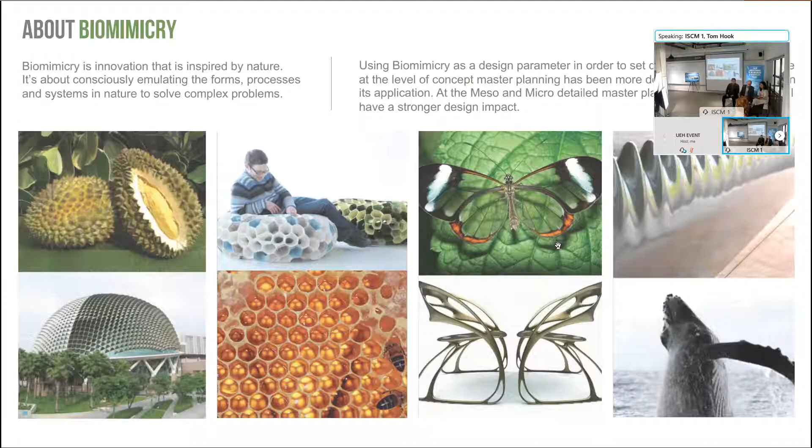Quan, one of the big things about this site was there were a lot of canals, a lot of waterways, a lot of natural systems already in place. Instead of going in and just backfilling it, we actually enhanced those waterways and used them as an asset or as a feature within the project.

Correct? When we went to the site, it's all mangroves everywhere, with the canal system. One of the things we see in Vietnam is actually a flooding issue, and the government is struggling dealing with that. So we came up with the idea of why don't we use nature to really create a solution for that issue, using landscape as infrastructure, which is a new trend that we apply to all of our projects recently, to really use nature to treat nature.

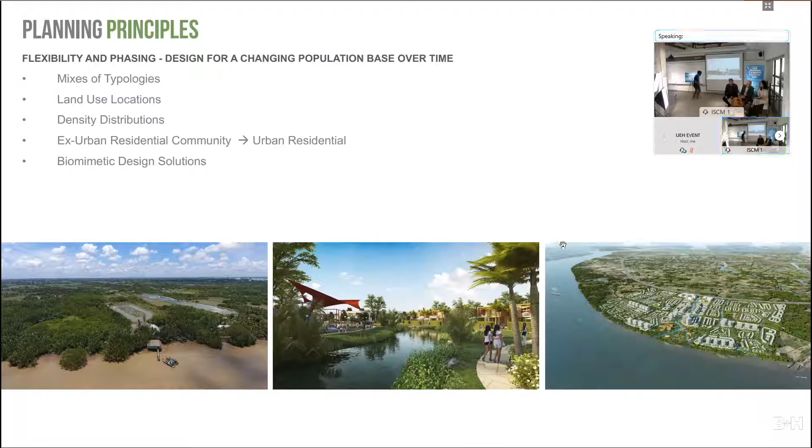Next, please. So we came up with this concept master plan. We really use the water system to create a framework. We don't define an urban grid anymore for this kind of project, but we use nature to create its own grid system, and we create communities around this natural system, which you can see right here, using the canal system to really define this grid.

We don't destroy that, we just enhance and create more of the waterways, but really connect back to the River in a very natural way. At the end of the day, that's still about the water management issue, so we don't have to spend a lot of money upfront for infrastructure.

And we create this kind of cluster of community around that, using the canal system and the landscape to really frame that community, which creates a phasing plan for the client to develop over time. And in that 50-meter setback of the riverfront, we keep it really natural.

We turn that into more of an education center. So at the end of the day, or on weekends, kids from Ho Chi Minh City can come here and really learn something about the natural ecologies here. That's the purpose, we create this kind of center for that education purpose.

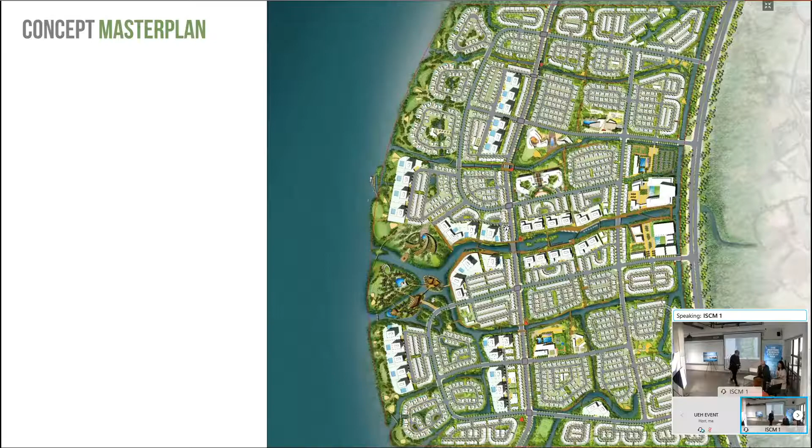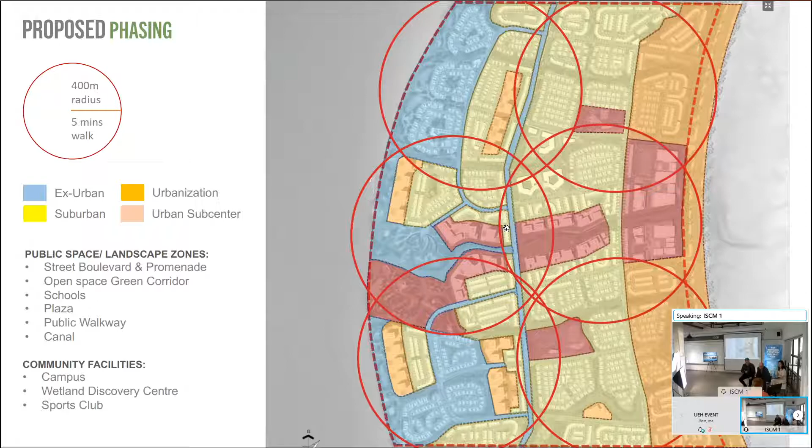Again, we propose the phasing plan just based on that kind of framework that we create based on the natural way. Next, please.

And we introduce stormwater management strategies, basically based on the system and landscape framework that we create throughout the project.

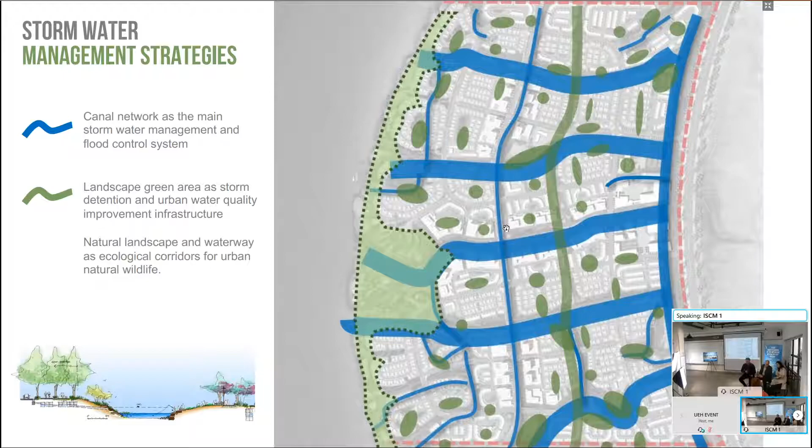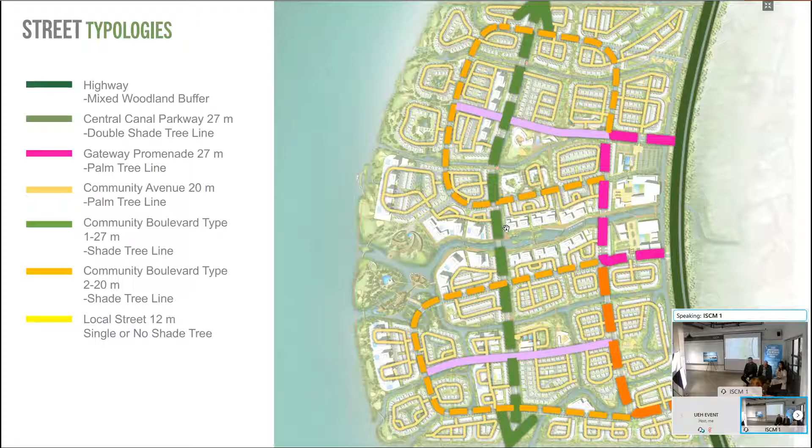Also, we define the street typologies as part of that. We usually define our road hierarchy based on the needs of people and how people move from one space to another, and how to connect all this community together. In this project, we create a very rich and continuous system for pedestrians to walk from north to south, east to west.

And the people have better access to the water system. Usually you see water features, but people cannot get into the water. We do it differently - people can actually have access and they can enjoy the water.

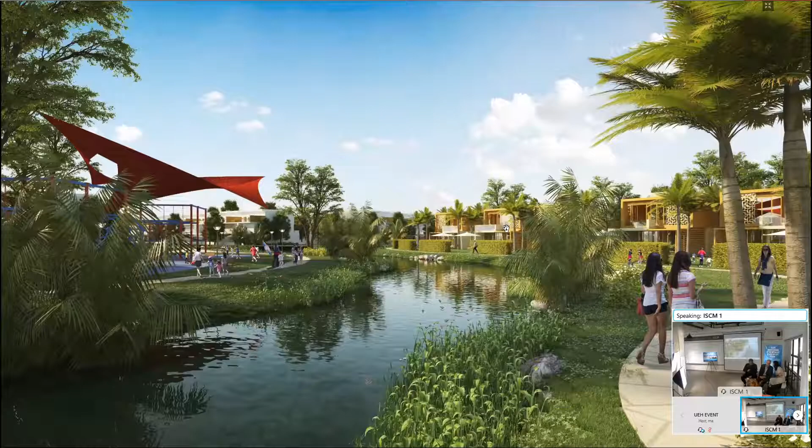Same way over here in this rendering, but you really create this kind of soft edge condition for the landscape. So you don't see concrete anymore. You see this kind of very natural setting using mangroves and all these species that live along the water.

To really reflect that kind of feeling that you're in Vietnam, not in Singapore or in the US anymore, right? Because this is Vietnam. And that gives its own identity to the community of Vietnam.

Okay, so if all of you know the District 9 area, which is now becoming the core of Thu Duc City - it feels like I'm on another planet. But if you know District 9, Thu Duc City and the core of the Innovation District, it's expanding. It's really the forefront of the eastern expansion of Ho Chi Minh City.

This is our new industrial and innovation future, and that is the main resource of the country's financial growth over the next probably several decades. So we were challenged to create a new urban center for that innovation district.

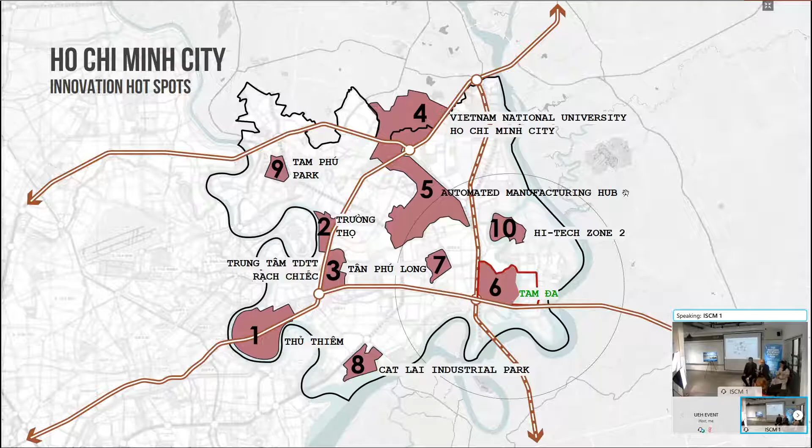So we thought of three big major agendas: innovation, of course, which is the driving force of the entire area; sustainability, meaning we need to integrate and balance workplace and living; and resilience, meaning it has to resist the inevitable change that will happen.

Our vision is a fully integrated public realm with accessible educational opportunities, based on the matrices presented earlier by Tom. This includes connectivity enhancements and distinction between district purposes, so each sub-district has a specific purpose and identity, with serious attention to increasing public amenity like shopping, retail, and culture, along with reduction of private cars and consideration of new alternatives.

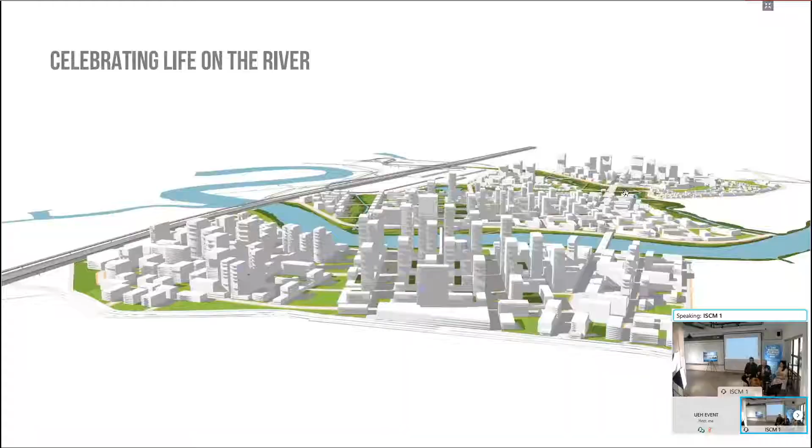This is all about celebrating life. This will be a CBD of at least 120,000 in the population.

Oh Tom, yeah, do you want to say something? No, go ahead Steve, I don't want to say anything.

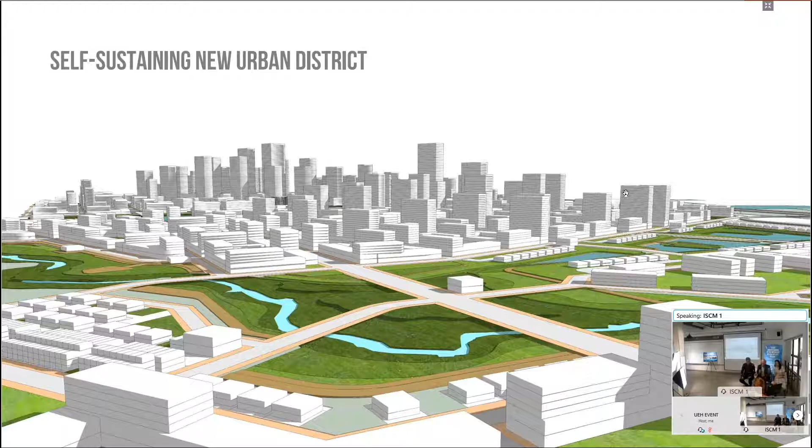Celebrating life on the river, creating a self-sustaining new urban district. These are office buildings, but also a variety of mixtures of densities of residential, low, mid, high, villas, shop houses—all kinds of ways of living like we enjoy in the center city. Innovation hubs, office buildings, retail streets, and a system of parks that link everything together.

In our recent masterplan projects, we're using the river as a center of development, not the center as development. So we develop everything based on the river, which unifies the center of this community—like thousands of years ago when people lived by the water and developed their urban centers on the river the same way.

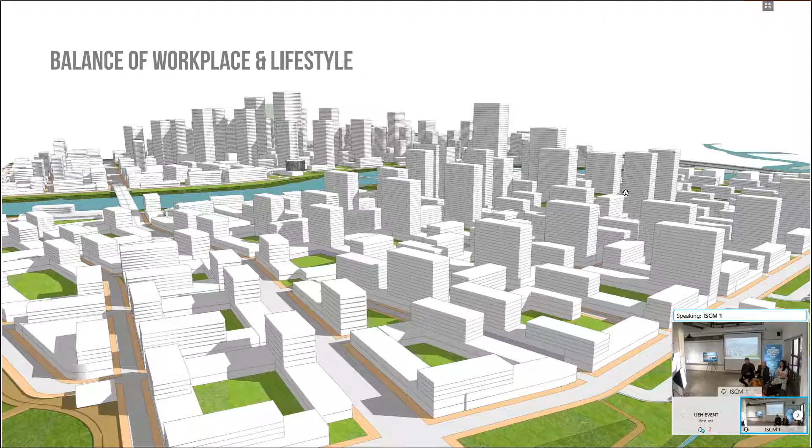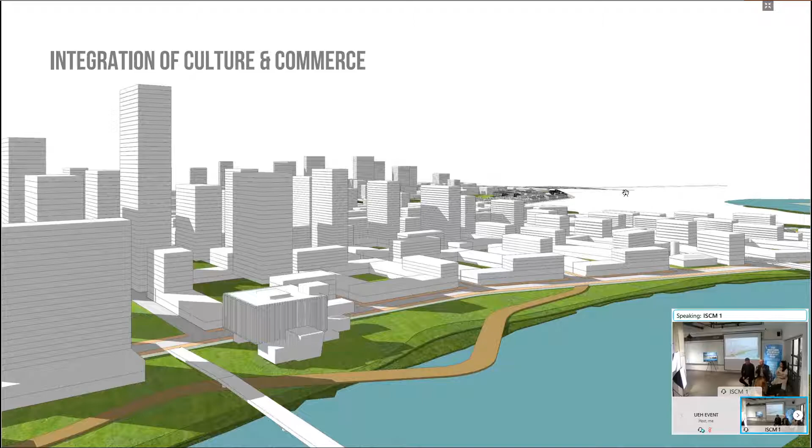It's really all about life on the river. Unlike District 1, we are bringing people to the riverfront, the river parks, and recreation activity. This is the new urban center of the eastern district, one we hope will inspire a new cultural core for that eastern expansion.

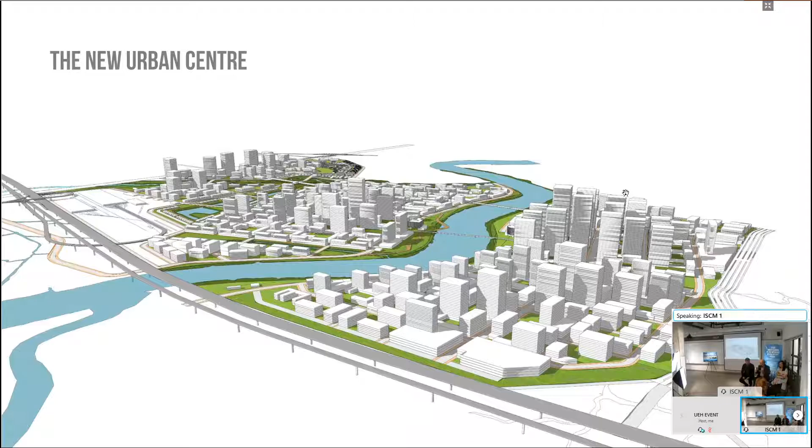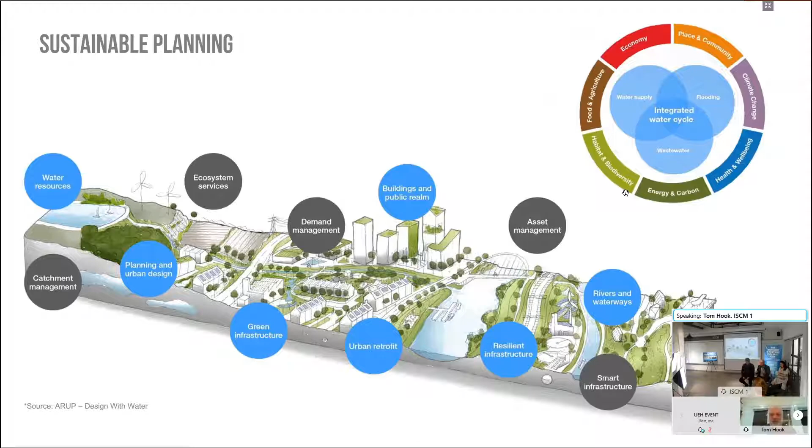Again using sustainable planning, through our greenways—using biomimicry and other methodologies—we are preserving and respecting the existing infrastructure of green and incorporating that into the new urban fabric.

A big issue here is land formation—how do we create resilience to sustain against the 2050 map I showed you earlier, where most of this place will end up underwater at high tide, especially during storm surge levels. So it's a balancing act.

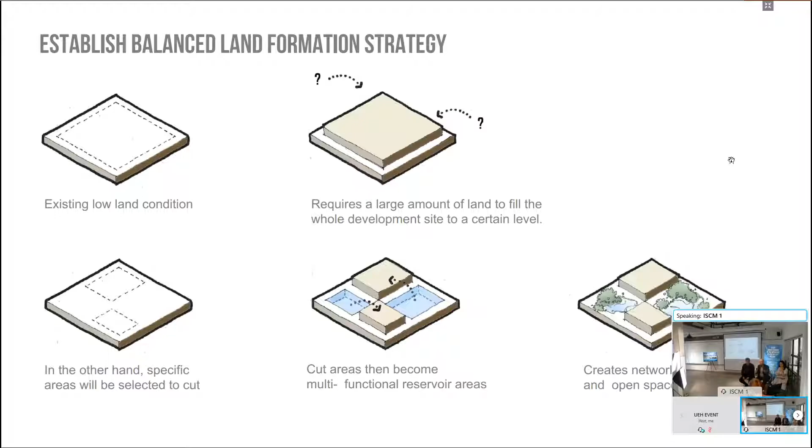Building, creating lakes, and then creating land. We use this strategy not only for this project but for many living by water and canals. Usually cut and fill settles things up—we classify where the soil will fill the land, filling up about 2.5 to 3 meters. We create water systems, lakes, reservoirs, and canal systems, using that soil to pump up the sites, so you don't have to transport soil from elsewhere to save cost. The water bodies can also be used for district cooling to cool our buildings. There are a lot of advantages—pretty much a balance, bringing life together with nature.

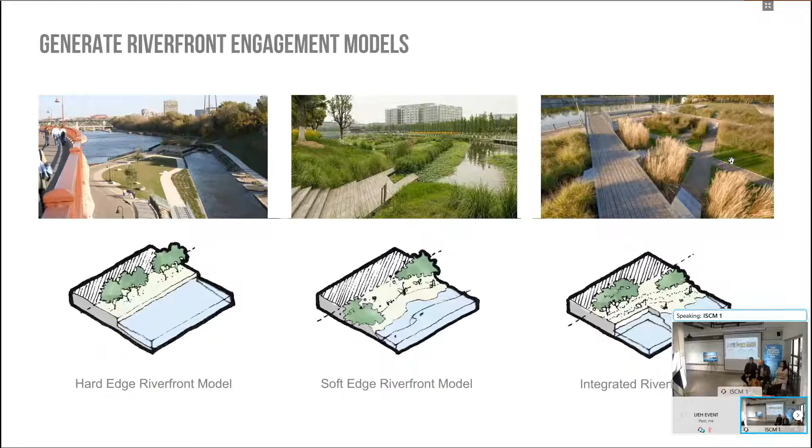We're creating a whole variety of riverfront engagement models—some riverfronts will be urban, while many will retain their natural ability to absorb water during rainy seasons. It's really about learning to live with nature and building on that, integrating it into the natural fabric.

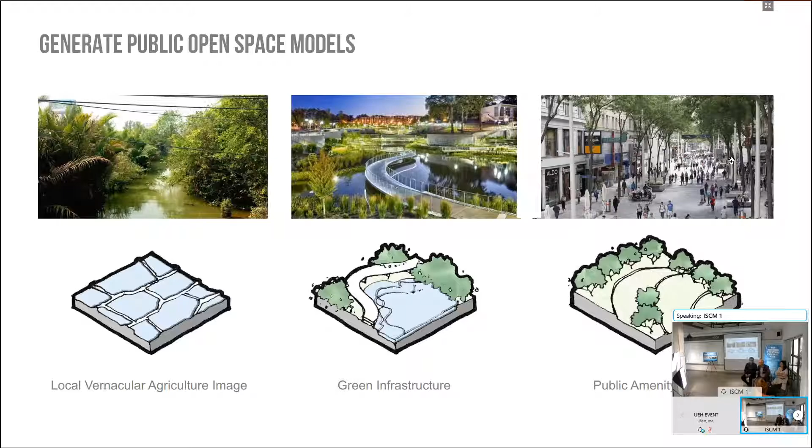The key to this whole thing is that when we started, we had no real development program—we had a limit of 55 stories. Given the land area of about 400 hectares, we sat down to think about the perfect balance of workplace, living, and amenity provision for the overall innovation district, remembering this is downtown for a much bigger area. Given our history with these kinds of projects, we created a very integrated and balanced program, and beyond that, we integrated uses not only in the same block but also in the same buildings—you don't need a car in this city to get from where you live to where you work, maybe just a scooter.

You can take mechanical bicycles from your place of living to your place. That was our third objective.

Another purpose of this kind of model that we see recently in downtown areas over the past 10 or 5 years: people started living downtown, like in Toronto 10, 15 years ago. Now downtown is like nobody's there, and now people are actually starting to move back downtown to live. That kind of model and thinking, especially what Steve mentioned about low impact on transportation, I think the community is trending towards that.

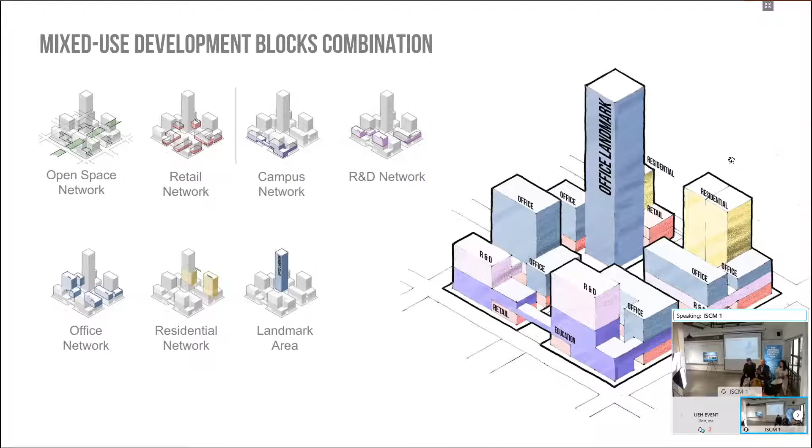So our plan is a street grid of about 110 by 130 meters, not unlike the average street grid in District 1. It has a lot of pedestrian transparency and access through that urban grid, acknowledging all the existing waterways, and creating a whole variety of density, workplace, and lifestyle throughout that urban context.

Steve and I learned a lot from the Saigon South Master Plan, which we did back in the 90s, and then the Thu Thiem Master Plan came out later on. We learned from those lessons because we'd been working on projects where the master plan didn't give investors enough flexibility to execute their projects. So this new modular system gives them that flexibility to really think about the building typology, what they're going to build, the cost up front, and what kind of land uses they're going to develop.

So the master plan we do is not from a big concept anymore, but goes from this kind of modular system on the building itself and spreads it out to the whole master plan. That is more feasible for office development to investors.

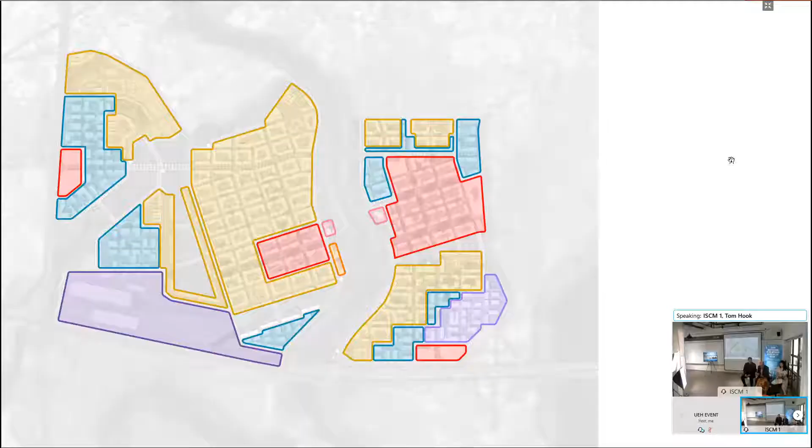So again, balancing workplace—the red is the commercial areas, the yellow is generally the residential—but we're integrating the blocks. We actually don't care if you build office or residential here. What we want to do is create an urban density that promotes vitality and gives credibility to providing amenities at the street level. We want a 24/7 city.

In the long run, whether we get a little more office or a little more residential doesn't really matter, as long as we haven't negatively impacted the traffic of the general region, and as long as we've attained good success with the amenity provision we're envisioning for this place. We have to make it all work. So if you end up building a bit more office because the markets are going in that direction, it's not going to upset the entire industry. That's where the flexibility comes into play.

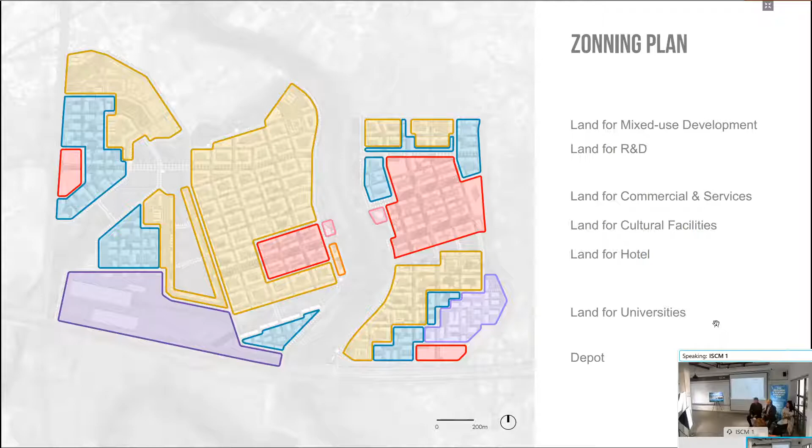And then again, an open space network at a variety of scales. The Tac River is the central river here, which provides most of the project's image and placemaking capacity. A lot of our cultural theaters and cultural provisions are along that river, which take the two halves of the city center and merge them together. But then there's a whole network of canal systems that go through the neighborhoods, and even urban parks within the blocks, making a complete and holistic synergy of open space that is integrated into that community.

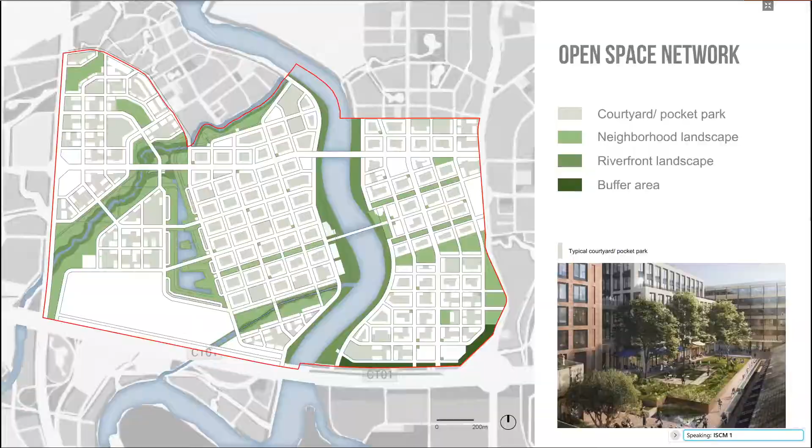Just let me make a bit of a comment. You start to see with these two projects that those drivers I was talking about for success are really being applied, right? Whether that's the mobility, the public realm, the mix of uses, getting the community the different types of amenities, and that matrix approach, that smart city approach. So all of these drivers we're talking about, we're actually applying to these projects.

That's a good point, Tom. It's a whole different approach that we're taking. It's from the lessons we've learned here since the late 1990s.

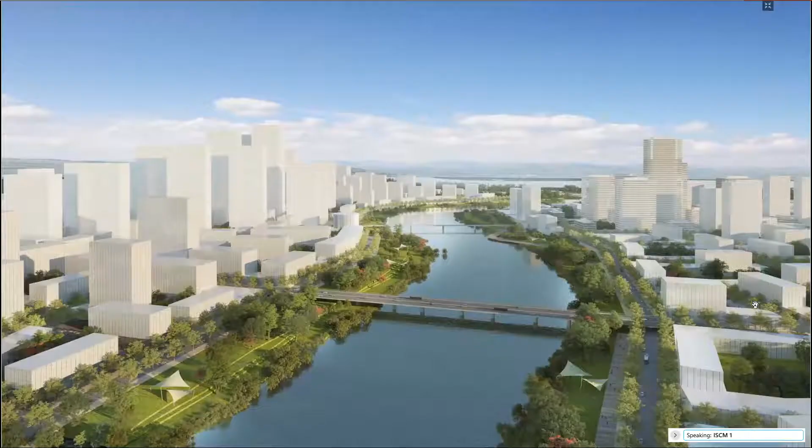Next slide. It is about respecting nature, but not just respecting nature for the sake of that. It's actually looking at nature and how to maximize or capitalize on that experience. Saigon is a city about life on the river. This is the Parisian image of Asia, but yet we can't reach that riverfront. So everything we do from now on should actually reintroduce that value back into our value and theory. All right, next.

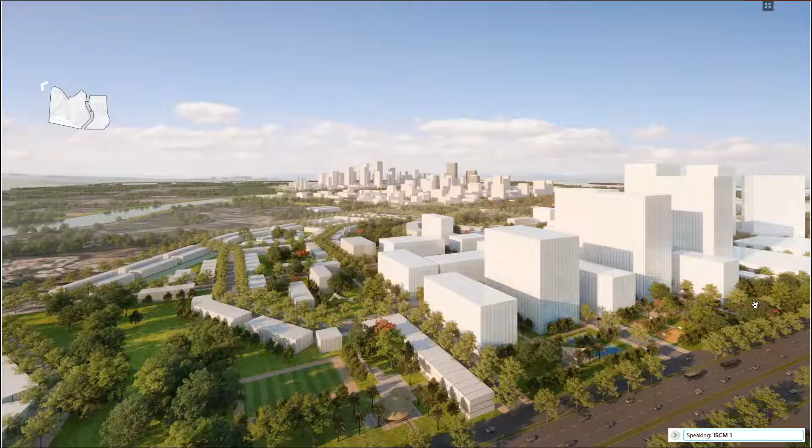Okay, and then next. And again, if you go back one, there's the lake that we're using to create a lot of conservation resource. And then we create a very vibrant urban image.

Into the time, I think we're over. So you saw a very low scale development. Now you're seeing a very intensive urban scale development. I think it's probably time to field questions, comments.

So we'd like to open it up to the audience and engage all of you. I surely have other projects to go, but I think it's time to follow up with your question.

I just want to capture a bit that we've been doing this kind of theories and biomimicry and all this kind of new thinking over the past few years in projects in Vietnam. So we apply this kind of concept in specific projects depending on the local culture, local environment, and the people there. So we're open to your questions.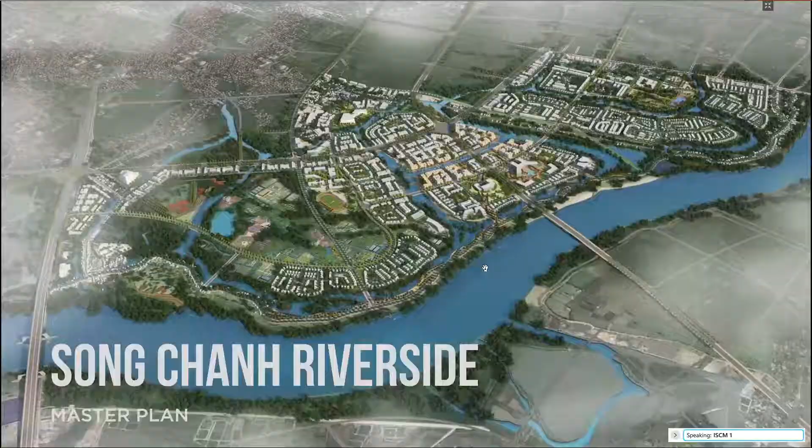Thank you very much, all of the speakers. I think we had a very good time sharing and learning a lot from the practical side, because from my point of view, I've been very happy because now I can see some practical projects that we can apply with some theory that I always try to share with our students.

But when they graduate, they say they have no chance to apply the smart city thinking, not only the technology but also thinking about the people. Normally when they go for the planning, they're always thinking about how to make the land use, how to make more money for the investor, and they just color the area by painting. So I think it's really very inspiring for all the people that we will have some chance to apply this thinking.

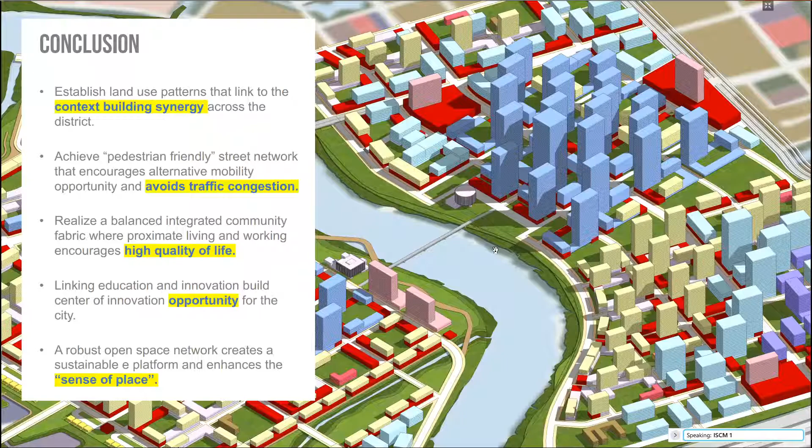Yeah, that's a really good point in master planning actually. Back in the 90s when we did the master plan, right now we're using the same concept in selling the products. So they're not selling the apartments, they're not selling villas, they're selling the environment. Right? So that's the key. There's always a balance in how you add value to these properties to really maximize the users, maximize the values of the property to sell in the market.

Very important. And those guys back in 1993 when we first arrived here, they were really pioneering. There was nothing there except mud and water. I just remember sinking up to my knees, walking through the site, getting on boats, making our way around. I thought there's no way we could ever build anything here. But now there's a lot of things there. It probably needs to be a little more office space down there.

Okay, any questions, please? Any questions? Yeah, yes, please. Thanks for your sharing.